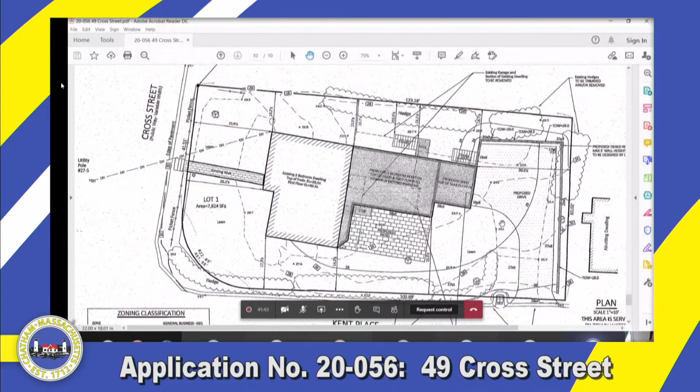As you can see, they've maintained the same line of the house on the northerly side, and on the southerly side, although they have a little connector there that's close to the street, the principal part of the addition is 25 feet back from the street. So they've worked hard, Karen has, and the Principes have, to minimize the impact on the neighboring properties.

Karen, if you're available, if you would explain the design and how we got to this location. This is Karen Kempton, can you hear me? I can. Okay.

The Principes had three main goals when we discussed renovating their house. Number one, they wanted a larger kitchen, dining area space, and a more open floor plan.

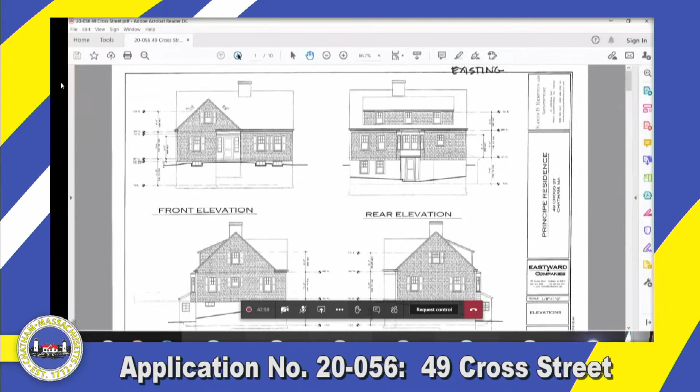Sarah, do you have plans of these? Yeah, can you scroll through the first floor plan? As you can see, it's a pretty small footprint, very small kitchen, and segmented rooms. The second floor, if you can scroll down, just has 2 bedrooms. There are presently 4 kids in the bedroom on the left, and Adrian and Stephen use the bedroom on the right, and they all share that small bathroom.

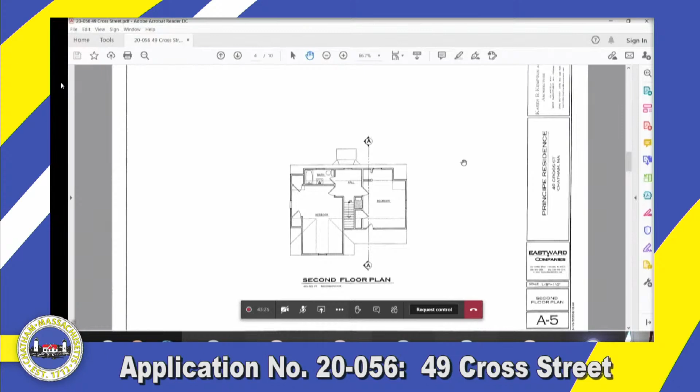And if we pull up the site plan now. The second item they wanted to do was better access into the house from the rear driveway. Presently, the rear driveway slopes down from Kent Place 4 feet. So as they walk around to the house to get into the existing house, they have to walk through the basement and then up a set of stairs to the first floor.

With the main focus, let's see, what's the other one? Oh, and the third item that they wanted was a new master bedroom suite addition, to spread out a little bit on the second floor. The main focus on all of these areas was to keep the house charming from the two streetscapes, Cross Street and Kent Place.

The thought was to use an addition to the rear that would allow for a larger kitchen, better entry from the existing driveway entrance, and have the master bedroom above as an extension of the second floor space. So if we can go to the new first floor plan.

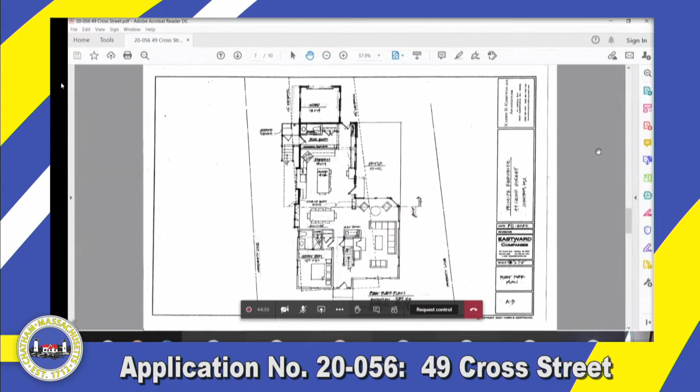There you go. The addition aligns with the north side of the house, and due to the angle of the property line, the addition meets the sideline setbacks. It was important to the family to have access into the house from this side and access to an outdoor shower, so a small outside shower and landing was added on the north side.

You can see on the left side of this that the landing and the staircase on the left side is within the setback where the garage used to be. But it's an important access into the house to have that there so they can come up and into the mudroom on that side.

Fill would be added to the rear to bring the grade up to both the driveway and the backyard space to allow entry into the first floor. So where the patio space is now, that would be brought up 4 feet so that it meets the first floor and is also in line with the streetscape and the grade on Kent Place rather than in a hole.

As Bill mentioned, there's a 3-foot wide addition on the south side, which has an angled bay wall to soften the corner, and it's reminiscent of the original bay window that is there. We can go to A1, go back. So if you look at the bottom, which is the right side elevation, you can see that 3-foot extension is the bay window, and then beyond that is the second floor addition.

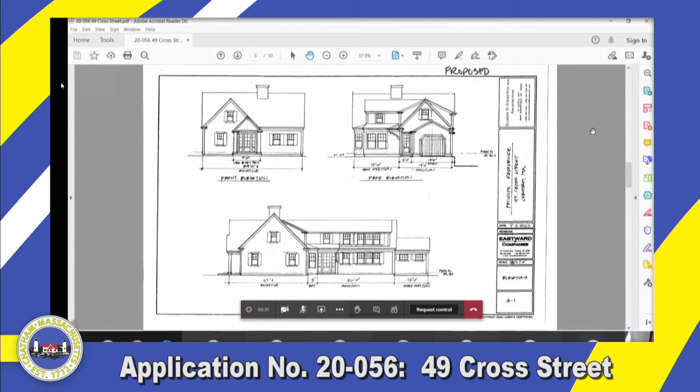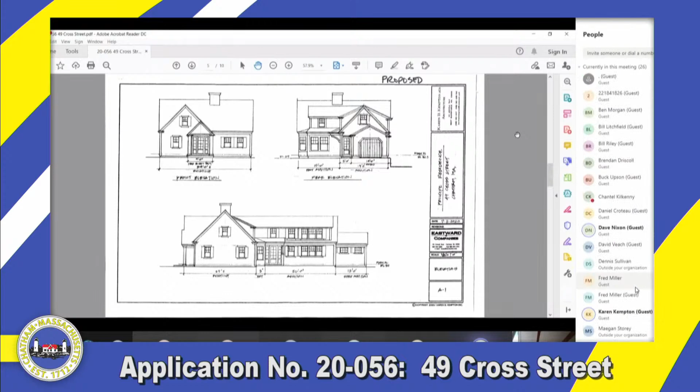The new dormer and windows would align with the existing dormer, and the new ridge would be lower than the existing ridge. You can see that new dormer, which faces you on the right elevation, that the eave aligns with the existing dormer eave, and the ridge of that aligns with the dormer ridge. Even though the new dormer wall is only 5 feet 8 inches tall, we felt it important to keep them low, to keep the charm factor of the older house.

A2 shows the outdoor shower and the deck. You can see the stairs going down to grade. This is side access for coming back from swimming to get into the house and upstairs to the first floor.

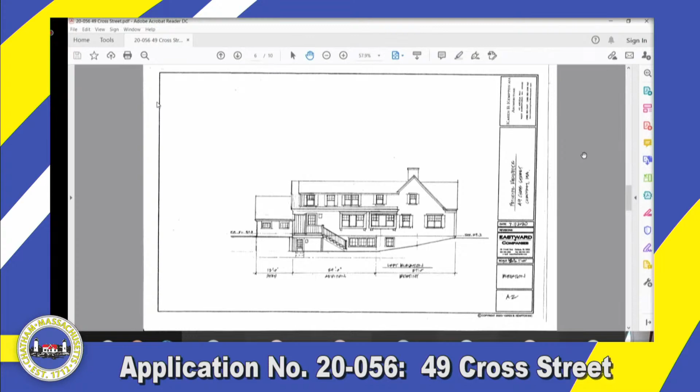A3 shows the kitchen and the mudroom addition. Basically, the existing kitchen is where that dining room table is. So they needed much better utility of space and it allows for a nicer entry to the house off of the patio.

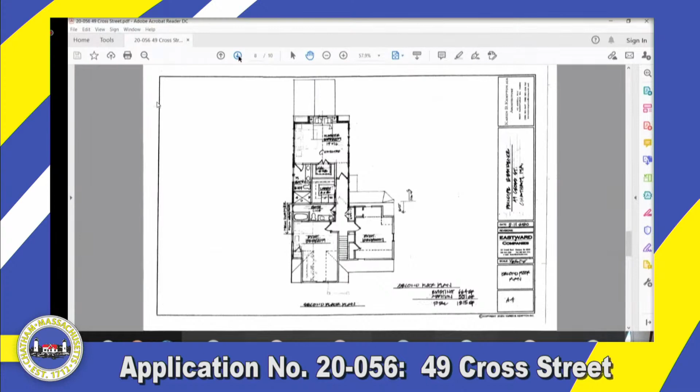A4 is the second floor plan, and the front 2 bedrooms are remaining the same. Kids will now be able to spread out into the 2 bedrooms with mom and dad going into the back new master bedroom. The laundry will be moved up from the unfinished basement into a laundry room on this floor as well, and a new bathroom will be added so that they're not all sharing one small bathroom.

We hope that you agree that this addition is nice and is keeping in with the charm of the neighborhood while allowing this young family some much needed living space and better utility of the house outside space with the new grading.

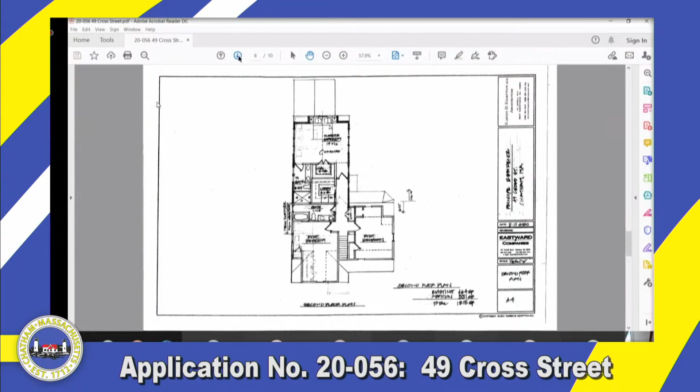Well, thank you, Karen. Mr. Chairman, I'll go through the criteria now. Adequacy of the size of the site, including but not limited to maximum lot and building coverage and setbacks.

As you are aware, I believe, when you build a single-family residential structure in a GB1 zone, we have different setbacks than we have for commercial buildings. So the front yard setback is 25 feet, which we happen to meet coincidentally, and the sideline setbacks are 15 feet. As you can see, from the northerly boundary, the existing building at the rear where it joins the addition does meet that.

So our proposed addition meets the setback from both the north and south streets, with the small exception of where the angle bay meets the existing house. And the lot coverage, it's a small lot, so we're going from 15.5 to 21. But because of the way Karen has designed it, I believe...

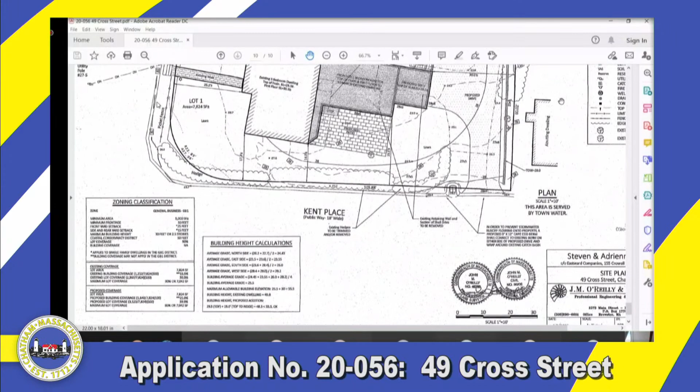Karen's plans didn't have a roof height on it, a ridge height, but I think that the building is quite modest and certainly isn't particularly tall. So I think that, in that aspect, there's no harm.

Compatibility of the size of the proposed structure with neighboring properties. Prior to, a couple of days ago, I had all the neighboring properties all listed out with their areas, as I usually do. Unfortunately, I then spent some time with somebody who tested positive, so I'm quarantining, so I can't get back to my office to get that information. But in general, this structure is considerably smaller than most of the structures around it.

And directly across the street, of course, we have what was formerly known as the Cyrus Kent House, which is a 10-bedroom antique, 3 stories high, and across Cross Street you have the old Bradford Terrace and all those condos that were built there. And all those structures are considerably larger

than this structure with its addition. So I would say we're compatible because to the extent it's compatible today, it's still going to be a small structure, but certainly isn't overwhelming the lot.

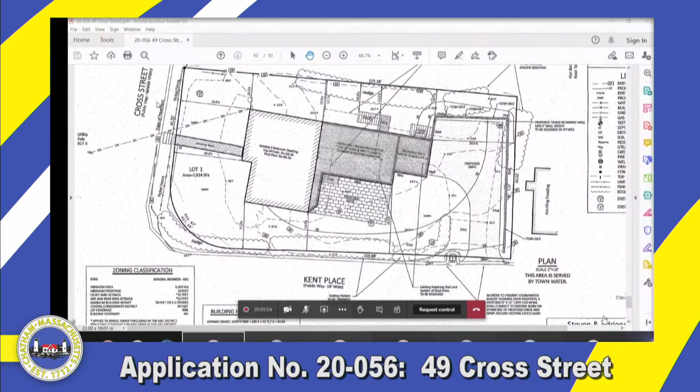Paul, back to a motion. This is Paul Semple, I'll move to close the hearing and move into deliberations. David Veach seconds. Okay, we need a vote on that. Dave Veach votes yes. Paul Semple votes yes. Buck Upson votes yes. Megan Story votes yes, and I vote yes.

Okay, deliberations, Paul. This is Paul Semple. I think the proposal looks very good. It looks like it has great neighborhood support, and I think it is clearly not substantially more detrimental to the neighborhood.

Buck: I'm here, Dave, 6 letters of support from the neighbors plus a very nice design, I'm in favor of it. Megan: I completely agree, it's nice to see that many letters of support. I totally agree.

Dennis Sullivan: if I were voting, I certainly would vote in favor of it. Mr. Thompson, Dave Thompson: definitely in support, a great addition to the neighborhood, it's a Karen Kempton design, it's beautiful. Thank you. Dave Veach: I concur with all the previous, certainly not substantially more detrimental and a real improvement, and I would agree wholeheartedly with everybody.

Okay, Paul, do you think we need any sort of conditions on this? Well, this is Paul Semple, I think it's a very tight area, and obviously we don't want any construction vehicles on Kent Place during the construction, I wouldn't imagine. So I'm thinking that normal construction activities and the June 30 to Labor Day restrictions would be appropriate. Anyone else want to weigh in on that?

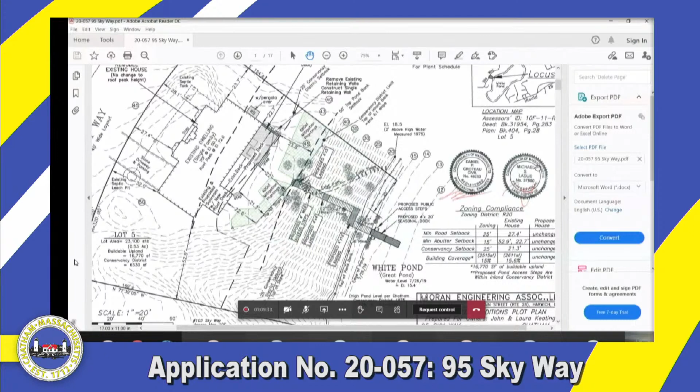If you approve the special permit, you can do so based on a finding that the site is adequate for the expanded deck and the deck above on the current footprint, and that this coastal site is both adequate and appropriate for replacing the at-grade steps with a safer set of stairs and a dock down below.

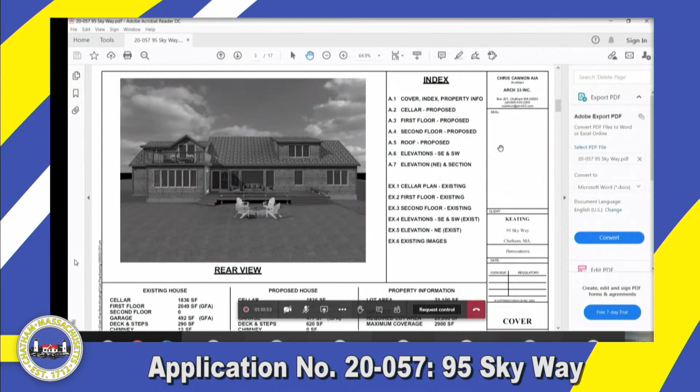Thank you, Sarah. As to the extent of increase in nonconformity, we currently are marginally too close to the Conservancy District, 21.3 feet, and our buildable upland is just short of the 20,000 square feet needed under the current bylaw. If you approve the special permit, there will be no change in coverage, no change in nonconformity. The decks are less nonconforming to the top of the coastal bank. The stairs and the dock are not nonconformity issues—they are instead allowable special permit uses rather than non-conforming uses.

As to suitability of site, impact on the area, slopes, and the natural environment, the pondfront lot has supported a house since 1991. The steps have existed for a very long time, but are in very poor condition, and again, they encroach on the neighbor's property. I think you can find the site to be suitable for the small additions up on the house and the deck.

Conservation Commission has heard this matter. For their own internal reasons, they decided to separate the additions to the house from the dock. They have already—the chair will read a letter of comment—essentially approved the decks; the stairs, even though we think they're an environmental improvement, are still under review. But I think you can find that they are an environmental improvement over the at-grade steps. The seasonal dock with access steps over it, as required for public access along the White Pond shorefront, is better than dragging kayaks through the bordering vegetated wetland.

Scale, siting, mass, views, vistas, neighborhood visual character—we have a relatively modern house in a rather isolated area, near the end of a cul-de-sac, formerly known as the dead end. The matters under consideration have no impact on scale or mass, no impact on neighborhood visual character. If you approve the special permit, the scale will be unchanged. All of the aspects of the proposal are at the rear of the lot. The decks can't be seen, nor can the stairs or the dock, except, I suppose, from the seaplane base we have in White Pond, but we've had no complaints in that regard.

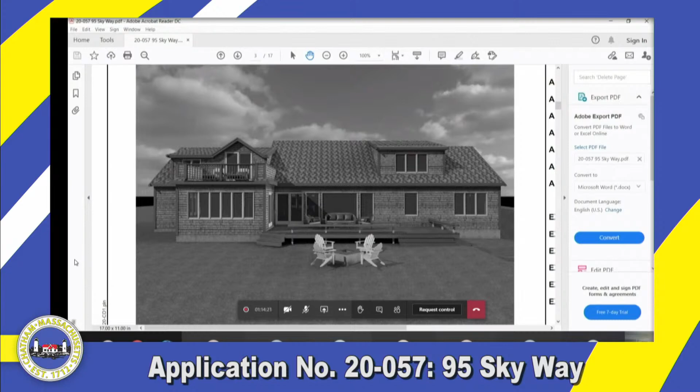Mark, Dan, and I would certainly be happy to answer any questions, and we appreciate your hearing us.

Thank you, Mr. Litchfield. Is there anyone in the audience who would like to speak in favor? If so, please indicate to Sarah now.

I see no one that would like to speak in favor. Okay, I'll read the correspondence.

First, dated October 6th, a note from Judith Giorgio from the Board of Health. I have reviewed the plans to add a deck and extend the existing deck at this property. The deck will not encroach on the existing septic system, nor will it add septic flow to the property. I have no concerns about this project.

We also have a note from Callie Harper, the conservation agent, dated October 8th, regarding 95 Sky Way. Representatives for this project submitted two separate notices of intent. First, proposed construction of a second-story sunroom, reconstruction and expansion of the existing deck, consolidation of retaining walls, and mitigation. Second, proposed installation of a set of timber access stairs with a midway platform and landing, and a second set of stairs down to a seasonal aluminum dock. The Conservation Commission approved the first item with special and general conditions. The second item, installation of the stairs, platform, landing, and dock, was continued to the hearing on October 14th. That's the extent of the correspondence.

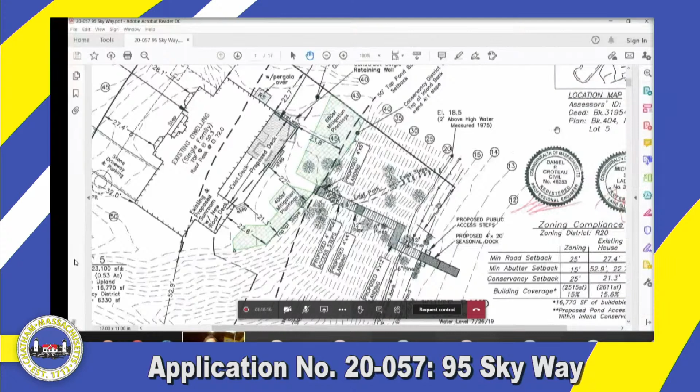The access stairs are pretty standard, I don't think they had any issues with them. The board wasn't completely familiar with freshwater docks, and they had a number of questions regarding, for instance, it rests on the ground, there's no pilings driven into the ground, it just rests on the ground. It's all aluminum, it's all inert, and the whole thing gets removed each year. It could be stored on the landing, the lower landing, there's enough room to store it there, or if they want to be ambitious and haul up the steps, they can do that too, since each section weighs about 150 pounds or less. So questions like that were given. They were going to wait and see if Ted Keon had any comments, and he deferred because it was a freshwater dock, he wasn't that familiar with them - I'm paraphrasing. But I think they were just waiting to get some more comments. The questions were minimal, they were all addressed, and we expect an approval at the next hearing.

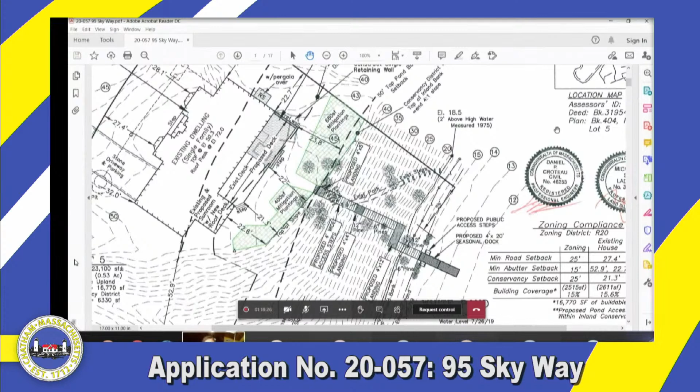Okay, thank you Mark. Dennis, did that answer your question? Yep, that's fine, thank you. Dave Nixon, any questions? No, Mr. Nixon, no questions. Dave Veach, David Veach has no questions. Paul, Paul Semple has no questions. And I have none.

Paul Semple: I'll move to close the hearing and move into deliberations. David Veach seconds. Okay, David Veach, how do you vote on that? Veach votes yes. Paul Semple votes yes. Buck votes yes. Megan Story votes yes. And I vote yes.

Mr. Chairman, Bill Litchfield, I apologize for having disappeared. Mr. Burgess responded for me and he did well, and I apologize for that. No, back, that's all right. We thought you did that on purpose, so there you go. That's okay, all right, so, deliberations.

Let's start with Mr. Nixon. Mr. Nixon: I'm in favor of this, it's a no-brainer.

Dave Veach: Yes, I am in favor of this. The steps and landings and proposals for going down the bank is certainly an improvement over what's there, and I can't help but believe it's going to be better, certainly for the property owners, but also for the environment in general. I don't think there's much doubt about that in my mind. There's nothing here that's substantially more detrimental, and it meets all of our criteria, and I will support it.

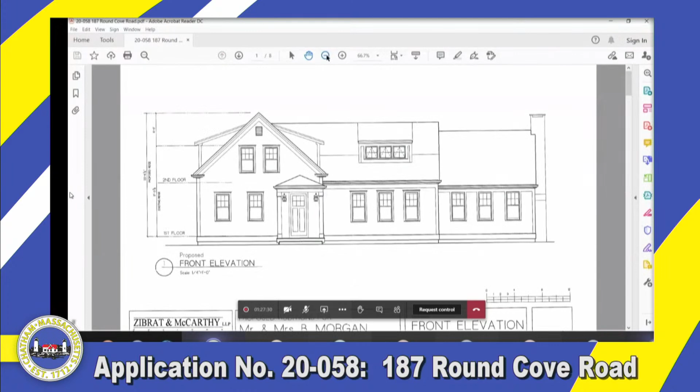For the extent of the proposed increase in the non-conforming nature, there will be no increase in the non-conforming nature of the structures. It's the lot that is non-conforming, and there's not much we can do about that. The structure itself will meet all of the dimensional setbacks, the coverage requirement, and the building height requirement.

The suitability of the site: we have a minimal impact on the neighboring properties. Mr. Morgan was kind enough to speak with the immediate abutter where the driveway will be adjacent to, and they're excited to have a better garden.

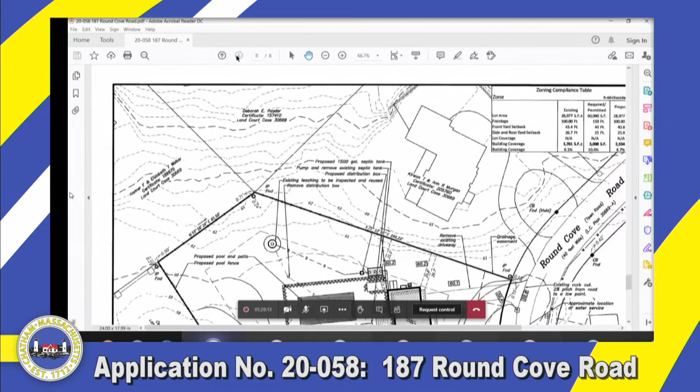There is minimal regrading that's required. The nearest wetlands are more than 100 feet from the property. Stormwater runoff will be contained on the site. From the driveway in particular, within the looped driveway, there's a low point for stormwater runoff, and in the backyard there'll be a low point put in to ensure that stormwater runoff maintains on the site.

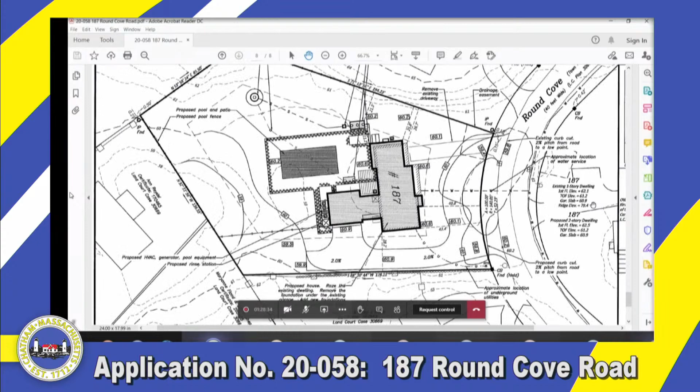So the proposed building is a 2-story, where a 1-story with a reasonable attic exists today. It will be set back from the road more than the 40-foot required, and the style is compatible with the neighboring properties.

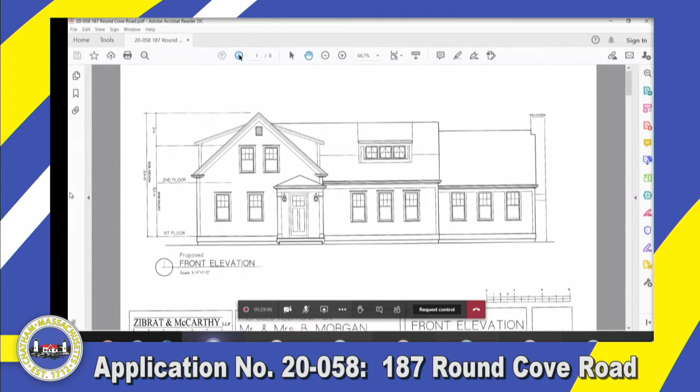The proposed uses are residential, compatible with a residential neighborhood. The property is served with a Title V septic system. The health agent has identified, and we've also shown on the plan, that the septic tank will have to move with this, and that there's plenty of pitch to be able to do so. Town water exists, and the drainage is proposed to infiltrate into the sandy soils.

There's no change or impact on the traffic flow. No noise or litter is anticipated. The utilities are adequate. We're not a formula-based business, and we're not in the floodplain. If there are any questions, I'd be happy to answer them.

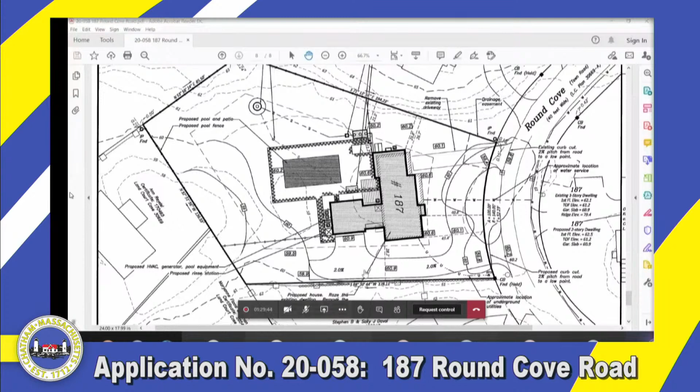Okay, thank you very much, Thad. Is there anyone in the audience who would like to speak in favor of this proposal? If so, please indicate now so that Sarah can see you. I see no one wishing to speak in favor.

Okay, I will now read the correspondence. First, from Judith Giorgio, our health agent. She writes on 10/6: I have reviewed the proposed plan. The proposal will replace the existing 3-bedroom dwelling with a new 3-bedroom dwelling. The house and pool area will encroach on the existing septic tank. A plan for moving the septic tank must be submitted and a permit issued prior to construction.

Then we have a letter, written on October 6th, from Ethan Shepard and Marianne Flood. They write: we are the owners of the property located at 298 Chipping Stone Road. Our property abuts the property currently under your consideration across the rear property line. We are responding to your notification of the hearing concerning the demolition and reconstruction.

We must express our concern on two fronts. Number one, that the lot in question does not meet the frontage requirement by more than 33% and contains less than 50% of the total square footage required in the R60 zoning district. Number two, that an increase of almost 44% in the square footage of the building coverage, from 1,761 square feet up to 2,534 square feet, although up to 3,000 square feet is allowed, would cause the proposed dwelling to impinge upon our abutting property line beyond legal setbacks due to the nonconformity of the lot itself, and potentially impact the environment through the reduction of permeable surface area.

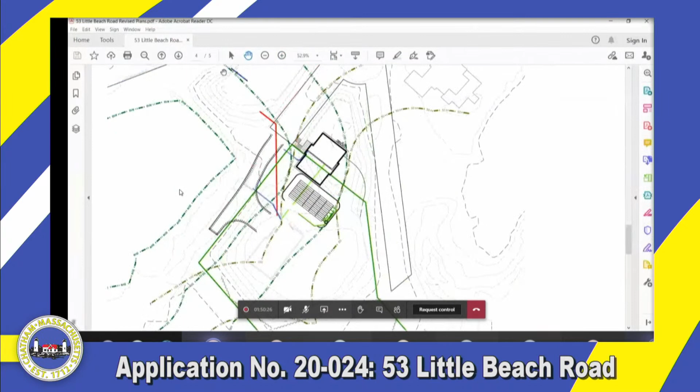Mr. Riley. Thank you very much, Mr. Chairman. Since our last meeting, the applicant has engaged in conversations with the neighbors who were in opposition at the last meeting, Janet Lonergan and Kermit Eaton. And they each had specific concerns, which the applicant has attempted to address. And I believe there's correspondence in your file from each of those folks expressing support for the modifications that we proposed.

One of the things that the board members had talked about at the last meeting was the size of the structure at 53. I just wanted to say we've looked at this situation six ways from Sunday. The point I'd like to make is that if you look at an assessor's map, and I think Thad's got one that he can send in.

Thad, are you on there? I am. Okay, why don't you have a discussion with Sarah so you can show that stuff you put up. I just emailed her that plan. So is it just from the town's assessment map? Because I can pull that up on my computer right now. I just emailed you a PDF that shows the building footprints in the neighborhood. Okay, give me one second to just log into my email. Okay, so while that's going on...

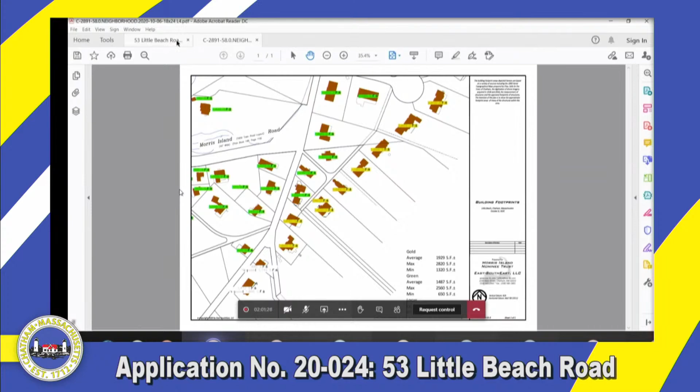So I'd be happy to go through the criteria, but you might have some questions - you might want to talk about it before we go to the criteria. Well, I think you should do the criteria now. Okay.

All right, so adequacy of the size of the site, including but not limited to maximum lot or building coverage and setbacks. We're in the floodplain, so there's theoretically none of that, but our lot is 33,000 square feet, and the coverage I've got here from Thad is - it says 8.7%. It's actually lower than that.

And we don't impinge on any neighbors. We have setbacks that are generous for the neighborhood - 25 feet from Little Beach Road, 60 feet from the lot to the north, and several hundred feet out towards the ocean. So I think the site is adequate for the proposed structure.

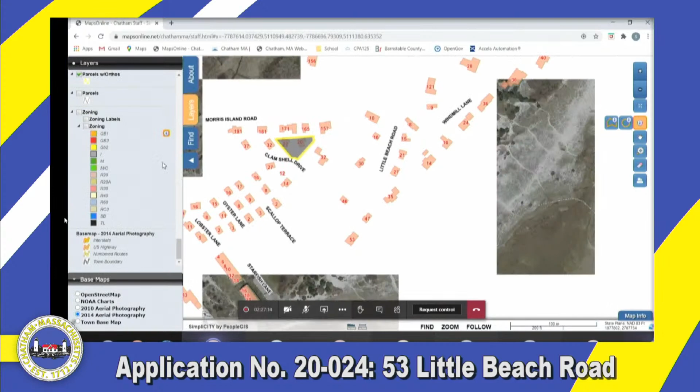Again, I appreciate his concerns. I think the concerns about massing, I suppose, make more sense. But again, you have plenty of other spaces. Now, Thad had done a satellite picture, a series of satellite pictures.

Do you have those, Thad? I do—could I take control, Sarah? I don't think we've ever let anyone do that before, so I may need to allow that. Someone's had that conversation all the time, Sarah.

Can you share your screen, Thad? The aerials I have are the 2014 aerials, which I just had up. Oh, there we go—these are... okay, I have. So these are 2005 aerials, and that's done right.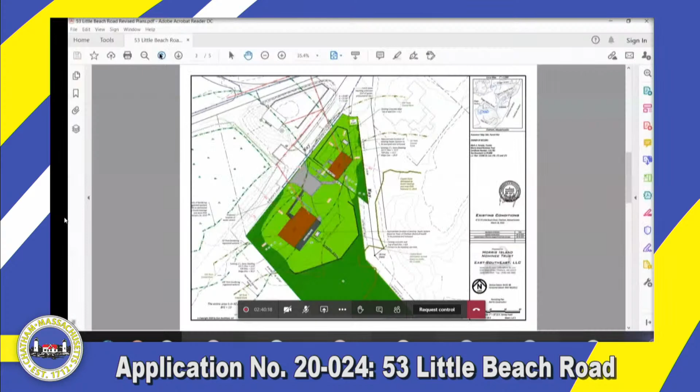The design change, I guess all the designs are in the eye of the beholder. To me, the new design is not as attractive as the old design, in that it looks a little bit like an apartment building as you look at that northwest elevation A, versus what was proposed originally on 53 Little Beach Road. But I take it this is more compatible with what some of the neighbors wanted. Right.

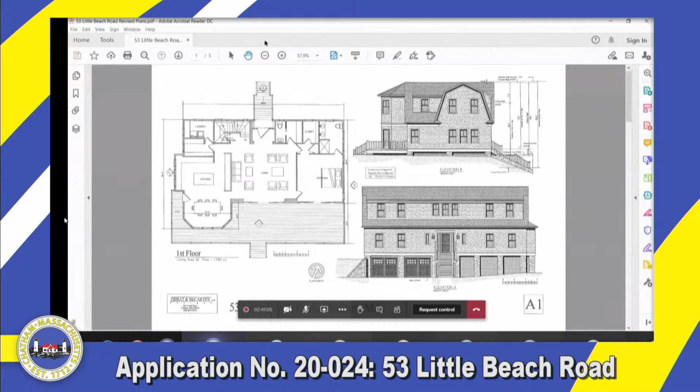As you say, the beauty's in the eye of the beholder. I happen to agree with your assessment of this, but they wanted the shingle look, and they got shingles, boy. And if I may, this again, the shared septic system between the buildings is elevated, and that's only going to help diminish the look, the height, as you're on Little Beach Road proper. The way in front of this is more of a walking path than where people drive, but that raised septic system is going to make this look a little more normal.

Okay, I don't think I have any further questions. Okay, Buck, do you have any questions? I'll take a stab at it. I had a question for Thad.

Is there somewhere on this print that designates a conservancy district, or is there none? No, the entire site is located within the floodplain. It's all conservancy district. So if there wasn't a house here, would they be able to build one? That's a question Paul raised at the last meeting, and the answer is you might be able to, but generally probably no. It's only because there's an existing structure there.

But if Sarah would move that assessor's map down a little bit, you'll see all of the Horn Cottages area, the Little Beach area, every square foot of it, between Morris Island Road out to the dike and back this way, every square inch is in an AE zone.

Not to point out how old I am, but when they proposed this bylaw, I pointed out that they were going to be putting a lot of property in a conservancy district. And the town meeting, with all its wisdom, went ahead and did it because somebody thought it was a good idea. So, yeah.

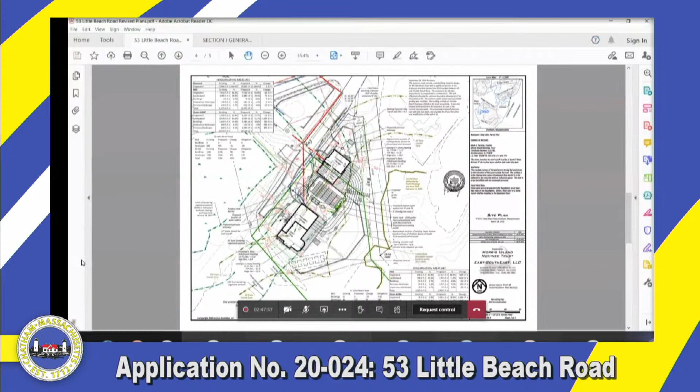But then I wanted to go back to what Paul was talking about, the AE and VE zones, and Sarah had a picture up there, maybe at 1,000 or 2,000 feet. How far is the VE zone from this property? There we go, the blue stuff there. I think that's VE. No, the pink stuff is. The pink is the VE. I believe so, yes.

And normally on the FIRM maps, the federal insurance maps, the VE zones have different elevations, is that correct? Yes, so that VE zone has an elevation of 14, and that would mean there'd be waves. That would be the maximum height of the waves in the VE zone, not the green, but the VE. Those waves would be 14 feet high. The crest of the wave would be elevation 14. So that's not a wave that's 14 feet high, that's the elevation of the top of the wave. I got you, all right.

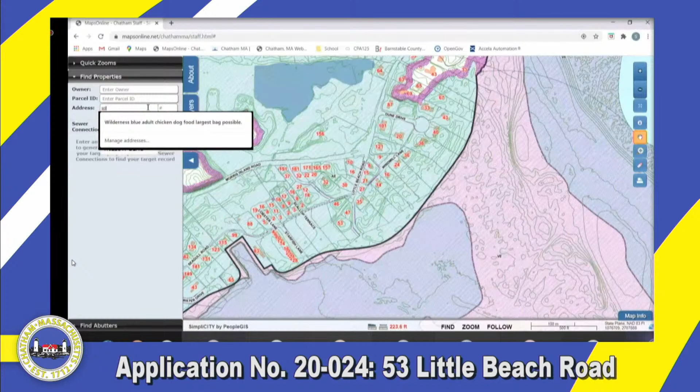So now 1 mile north of this is Wilkey Way. And if the town website is updated correctly, is it possible the VE elevation at Wilkey Way would be 22 feet? Yes, it's a different variety of velocity zone. There's a splash that's going to occur against that revetment, and it'll splash up to elevation 22, and then it lands right there. Those splashes are filled with shell, rock, rubble, and basically bullets in the water as it comes down, and that's why they put that there. The other option is that's an over wave run-up where the waves are going to get to 22. But if it's 22 at Wilkey Way, it's probably that splash.

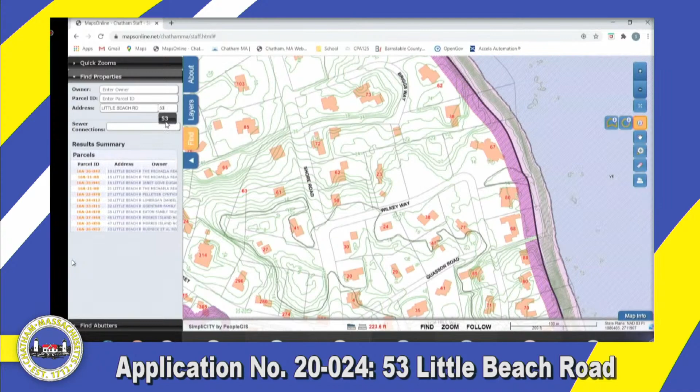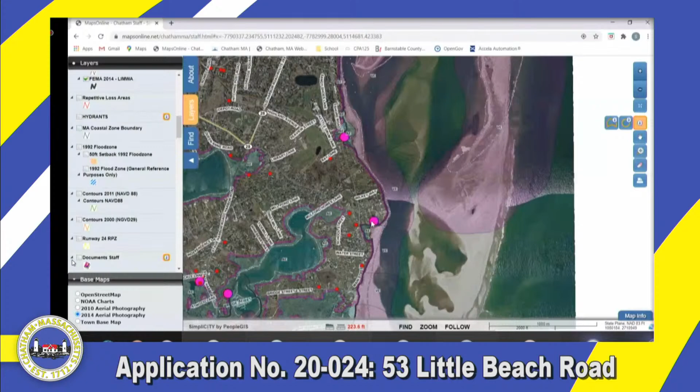Okay, so correct me if I'm wrong, Thad, when you stand at Wilkey Way and look due east, isn't there a barrier beach out there? There is. Okay, and that doesn't show a barrier beach there. Well, when you're down at Little Beach, the point I'm trying to make is Little Beach has no barrier beach in front of it. Well, actually, the Lighthouse Beach extension right now is a barrier beach that's in front of Little Beach.

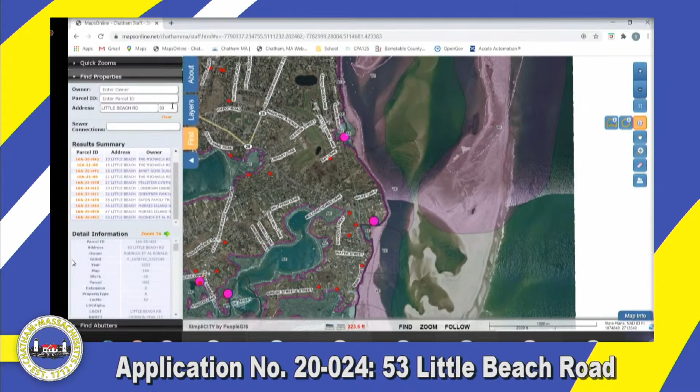Can you show me that on the photograph, the aerial there? When I stand at Little Beach and look out, I see the sand from Lighthouse Beach, but I don't see the outer bar, if you will. Well, do you know what I'm saying? Yeah, but how does this... My concern... Where are we going with it, Buck?

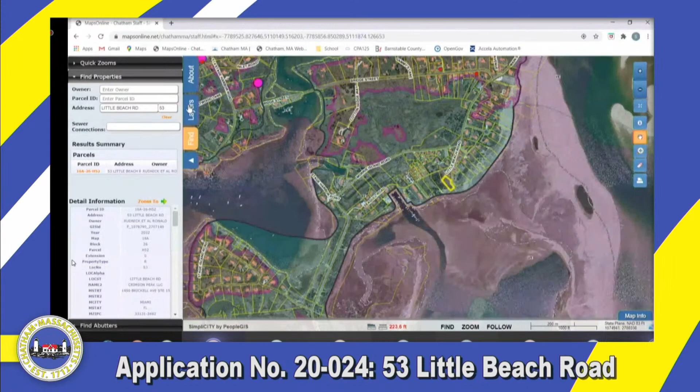I mean, my concern is that there's a lot more, there should be or could be a lot more wave action due east of Little Beach than it looks like to me. You've got a pretty good storm surge potential coming in and hitting buildings on Little Beach. And that's why we want to elevate the building, and elevating the building increases the cost. That justifies, at least in our mind, the expansion of the structure. Right, you're going up to 15 feet, but I don't know if that's enough.

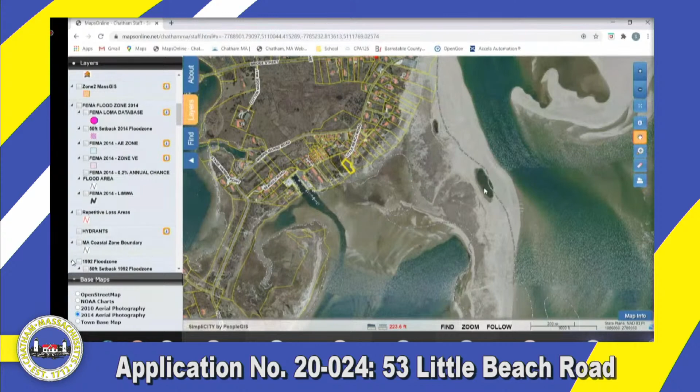Is really... I see a lot of sand there, but I was actually talking about to the right of that pond, the little one, which is no longer there. So this is an old photograph, obviously. I wish we had a more... is this 2014, Thad? If that's 2014, give him 1 second, I can pull up 2019. Thank you.

But Buck, the whole point is that it's an AE zone. If we're relying on the flood insurance rate maps, we're mapped, and our regulations prohibit us from elevating more than 1 foot above the base flood elevation.

And Thad, what's the... so when you're elevating in an AE zone... I think, well, that was actually reinterpreted. So the AE zone that we're in is elevation 13. Under the building code and under the local bylaw, we're required to hit 15. If we were preserving the buildings, we would not be allowed to elevate higher than 1 foot. Because we're going with new buildings, we're allowed to elevate higher, and we're going to elevation 15 for that extra freeboard. And the extra freeboard enables them to reduce their flood insurance premiums, so that's why they do it.